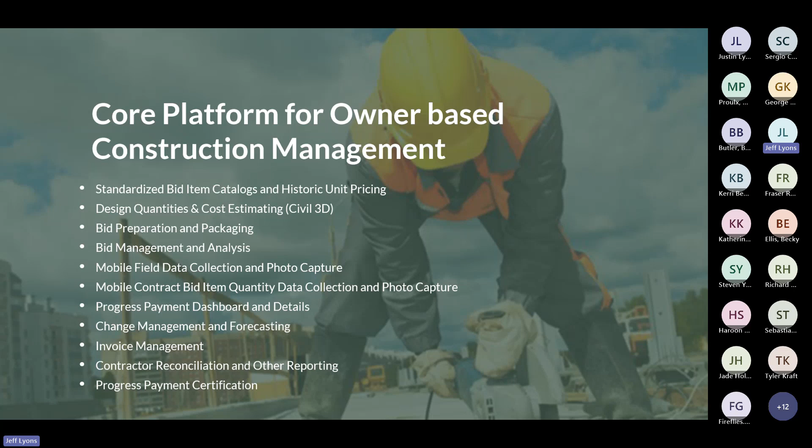This is the core competency of our company. We have over 120 organizations in Canada, over 40 municipal clients and the federal government using Builterra. It's been around for about 10 years, so it's very mature, and our consultants like to keep us moving, building more product, more features. So you'll see some of that today.

The enhanced platform for project management is something we added to address partially the US market and some of the competition, but largely we are built from the ground up. So we do provide these kinds of functionalities, but our strong suit is the field inspection, contract administrator, project manager level workflows. In other words, we make it easy for construction people to use a digital product.

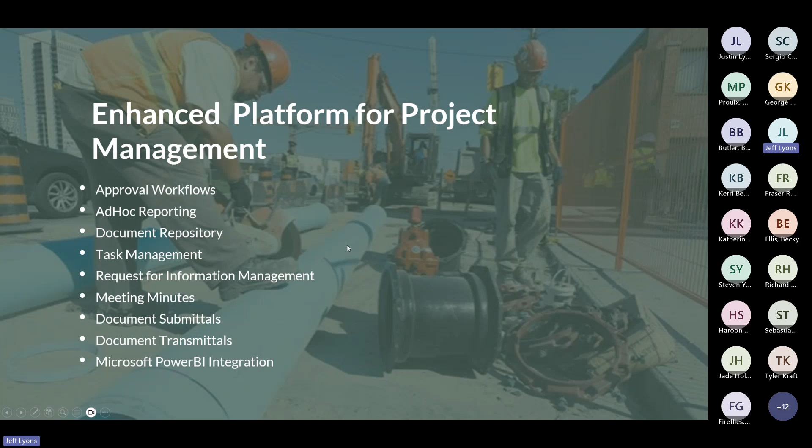So everything we do is geospatially aware, and the user doesn't know anything about that. They can use the mobile app, they can use the website with very little training. So collecting data and reporting is what we do.

We do support the more accurate GNSS antennas, for example Trimble Catalyst, EOS Arrow, and many others, as well as locators. So if you're using this for paint line locations or subsurface utility mapping, our mobile app is capable of doing all of that. Again, it's very civil focused, very linear focused.

In fact, we're probably one of the only mobile apps that has the ability to read a Civil 3D alignment if it's been posted to the Builterra project. I spent the better part of 25 years in civil engineering, so these are all of the things that I wanted to see in the app itself.

Okay, now let's get on with the project itself. This really started in 2015, and it was prompted by RV Anderson and WSP at the start. Builterra was really built, I'll call it, in the heat of the fire. We built it specifically to do City of Toronto CIPP work.

Now, City of Toronto does not have Builterra, but we did build what we'll call a bid catalog for the City of Toronto projects for our consultants. So if you're building out a bid manually or through the cloud system, which we'll talk about in a second, then we have the City of Toronto bid already in the system. Now you can also add other cities, towns, counties.

So this is the thing about civil engineering: everybody's got their own sort of take on what a 12-inch cement-treated base is, with their own item codes, and I think you probably know that through working with DOTs. Everybody's got their own different little item, even though it's probably the same thing. So Builterra can accommodate all of these different catalog types based on your work.

You can also enhance things. So this is something different. I think as well, we're one of the only ones that can enhance the bid item to include design-specific attributes. And this was put in specifically to extract and populate bid tabs from the design, almost like a building information modeling concept. And because a CAD designer and a GIS person built this system, this was sort of the avenue we wanted to go.

In other words, item code, description, and units is very little to do cost estimating. We want to be able to do cost estimating based on the depth of the pipe, the class of the pipe, was it built in spring, this kind of thing. So we can handle almost like a GIS type query when it comes to estimating.

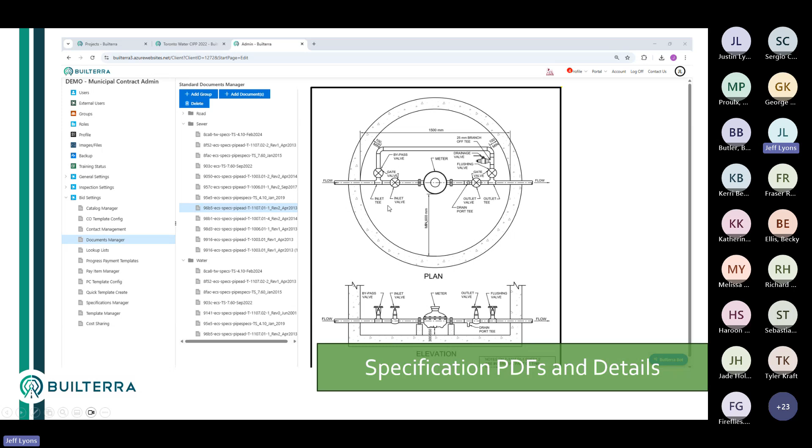You can also add details to the documents manager. So if you're dragging and dropping this particular item, it will bring the detail with it. It'll bring the written spec with it, so it's part of the bid package. So just thought I'd let you guys know that. And of course, you can add the bid documents manually if it's not attached to an item here. So you can start adding them, and this will be part of that bid package. So you could add contracts, whatever you want to do.

In the end, you're going to award the bid, and there's a little award button back in the bids tab. Under progress payments, you'll now see a zero inspected bid, essentially. And this is where we get to go to the field. And this is sort of where a lot of our consultants start. So going to the field is you import the bid data, make sure the pricing is right. You award it to the bidder who won. And then it starts this construction contract admin process.

And like I said, it looks fairly straightforward so far. I don't know how you're doing it, maybe pen and paper, maybe something more complicated. There's other larger systems which are good for office people, but not great for field people. So we focused our entire effort on field data collection. And so we have people, 18 to 70, literally, using the Builterra app. Stories like when I started using the app, I was just about to retire, but then I decided to keep working for 2 more years. That's an actual story. Because it's easy to use and it cuts an hour off a day for anybody using Word or field notes.

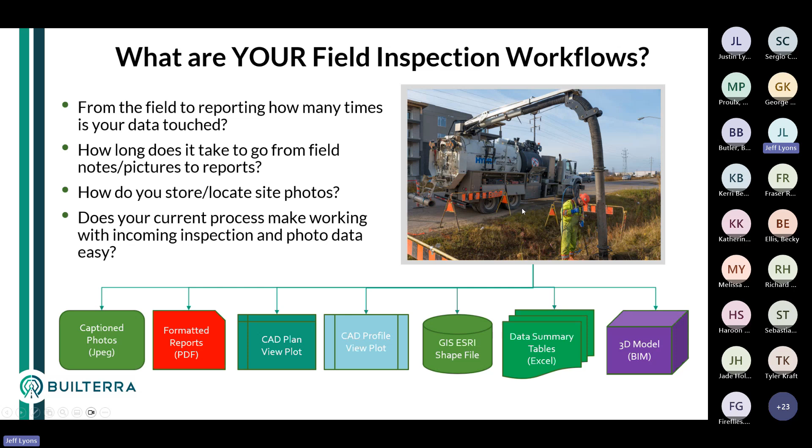The idea is you pick up the data and then you do something with it, and this is where we come in. You'll notice Hydrovac; one of our pre-construction use cases is subsurface utility engineering. We're big into that. We're also big into geotech. Also big into bridge inspection. So Builterra is used all over the civil world to do data collection and reporting.

The app, like I said, is very simple. When you log in with your email, you'll see your list of projects that are assigned to you, and then literally you can do something. You can go to forms, documents, or tasks. That's it. Buttons are pretty big.

Even borehole logs can be captured here. It's one of our more interesting use cases. Of course, task management, documents, take photo anytime, anywhere. So this is easy to use.

The documents thing is you can access any uploaded document to the document repository. Specifically, you would want to put documents that the field people want to use. So in this case, I don't know if they'd want to use CAD standards, but say a geotech report or maybe issued for construction drawings or something. So this is not meant to be as extensive as a Bluebeam, but if you're only using Bluebeam to review PDFs, you might want to rethink that.

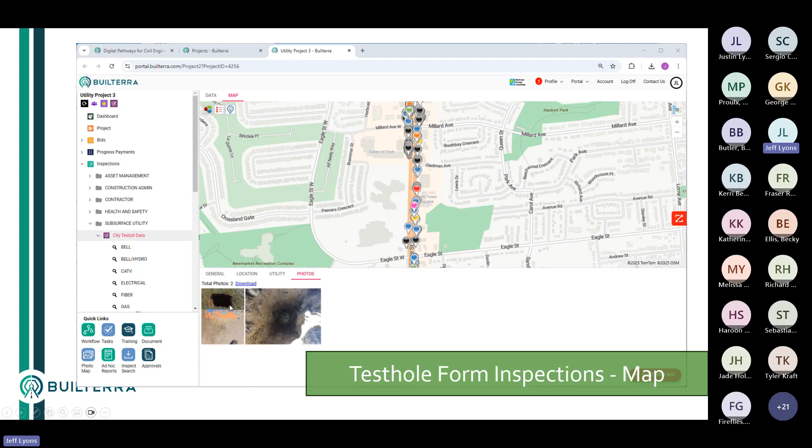Nothing to do with construction management, but it's in the exact same system that all of your construction is being done in. So if you're looking at a map, you'll see all of your construction related tasks and other things with all of the hydrovac if you want. So it's all one big database. The mapping system, you can do thematics, theming these, in this case, by utility type, and of course, access to geolocated photos and data. The tabs at the top change as you configure the different data. So very flexible depending on what you're collecting.

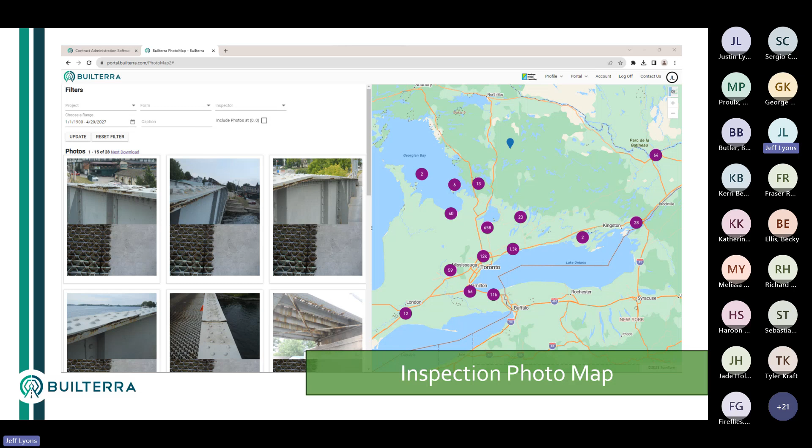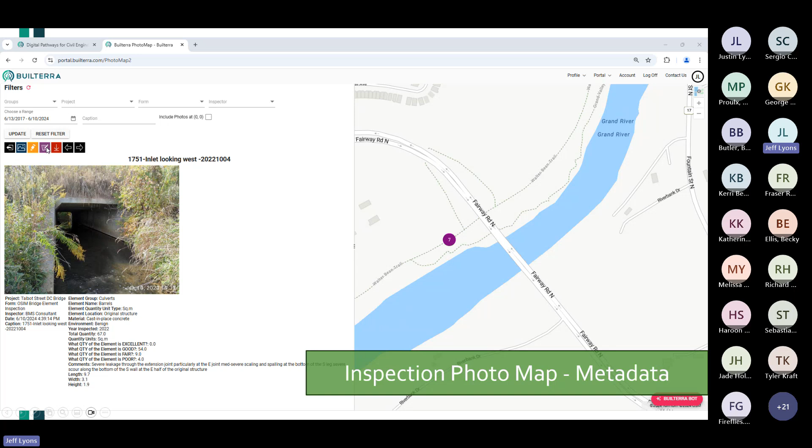There's 7 photos here. I guess I missed that slide, but if I select a single photo, you get the metadata. You can select the download report and you can see exactly where was this photo, why was it captured? Maybe 5 years ago, somebody was in there doing a culvert inspection. So that's an OSIM report right there. That's a standard for Ontario. So that's the kind of cloud functionality that is used here.

If we take that mobile inspection piece and expand it, we get into more of an open form, it's called daily diary. It could be called anything, but all this is configurable. The daily diary is a little different. It's not just a single visit. It could be you're going there multiple times to add multiple lines of data for multiple things. So for example, if you have labor, equipment, materials, visitors, comments, contract items, it's all sort of like sub-tabs, sub-tables in the parent daily diary report or the site daily report.

So the concept here, and this was well thought out when we worked with the consultants, was when I select it, you could create one brand new, or you can preload it with Excel. And preloading it means that people in the field can simply go, oh, this is the day I'm adding to. And when you have a large project like CIPP or road resurfacing, you could have one huge bid, which has multiple streets in it. And the idea is you might send out 10 inspectors to 10 different locations, and you could have them all do all of their quantities for that single project all in one daily progress.

And so it's a database, so as they're adding progress quantities, it's compiling it in one single progress report. You don't get 7 different progress reports, and it has their initials beside the quantities, so you know exactly who did it, what street it was on, this kind of thing. So again, I don't know if there's other systems that do that, but it was very specific to these city projects that we have multiple people be able to access the same form. Location's not so important for daily progress, but you still get it anyway.

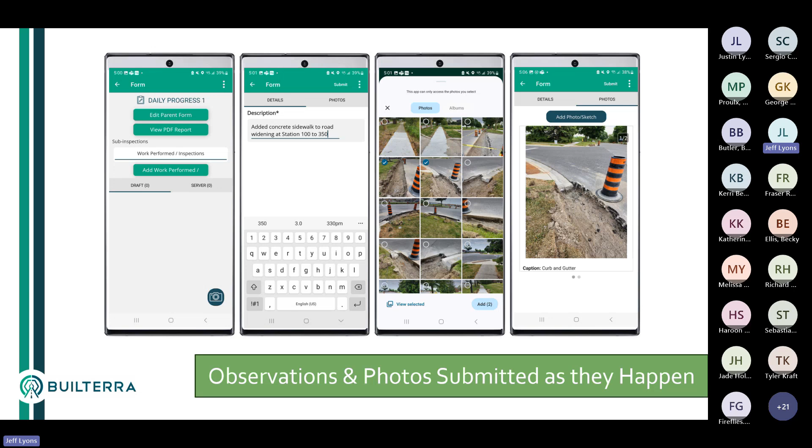When you submit, keep in mind that it's like a little text message. It just sends off to the server. It's not that at the end of day you're putting this together; this is all throughout the day. So it's as it happens. Okay. You can mark up those photos too, by the way. I didn't show that. So daily quantities is a little different.

We talked about the concept of awarding the bid. So daily quantities is a subtable that's been tagged with, hey, go to the awarded bid. And so again, you're going to select this. You're going to get into a section group here. And then here's all the bid items. So then you'll see how much is in the contract, how much has been built to date. So it's all reading from the database online. We do work offline as well, just in case you had that question. Being up here in Canada, we have lots of offline use cases.

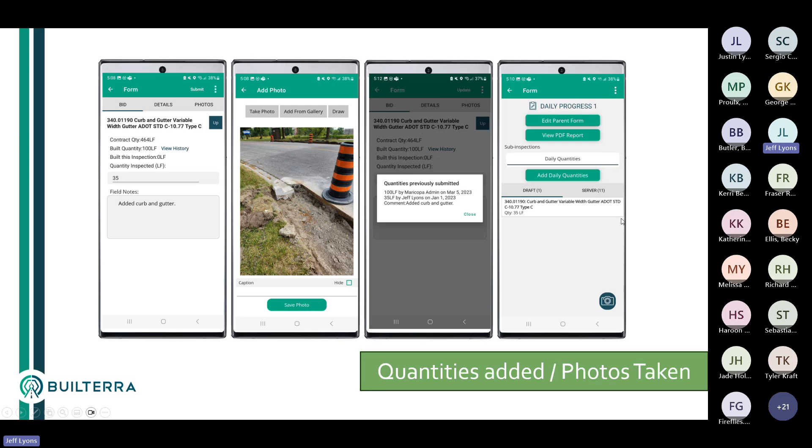So when you select an item, you'll see how much is in the contract built to date, and you just type in the 35 feet that you're observing and take some photos. If you're interested in what happened last time, you can view history and get a list of all the other inspections you did. The bottom line is you will then simply submit this entry, and that's how you feed the progress payment. That is why we can start generating progress reporting through the system. Very easy to do.

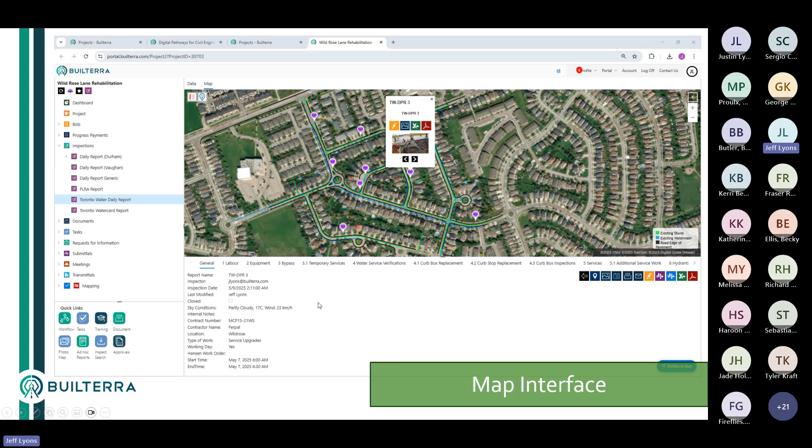The progress reporting in the office now, or a site trailer, if this is a laptop essentially, you'll see all the inspection data with all the dailies here with photos, okay? And like I said, this one is actually this Toronto Water Daily, and it has so many subtables here. It's kind of crazy. So you've got like 20 subtables. So they had a very detailed use case, I guess, that needed all that. Bottom line is you're going to add entries throughout the day, and then you're going to take pictures, caption the pictures. And there's some photos here.

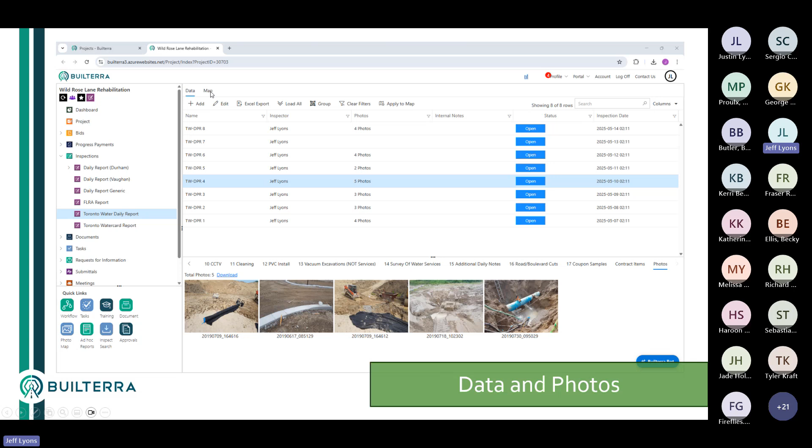Okay, very good. Anything in a map view, which we don't really see here, it's not important, but basically you could review all the dailies in a map. If you want to edit the inspection, it sort of just pops up a pop-up window, different tab. And these are, again, all of these, looks like they have 17 different subtables, plus the contract items. So it's kind of a lot. I would probably break these out into separate inspections and do something else, but that's what they wanted.

So the idea is when you add here using the laptop, you can do exactly the same thing. It'll drill into the awarded bid, you can pick the items you need, select the quantities or type in the quantities, and then it will produce the progress payment reporting. So very connected. This is the output. So every report we do is stylized based on what the client likes to see. In other words, we're not trying to change the way they like their reports to come out, we custom code this to match their current standard. But the entry systems are always the same.

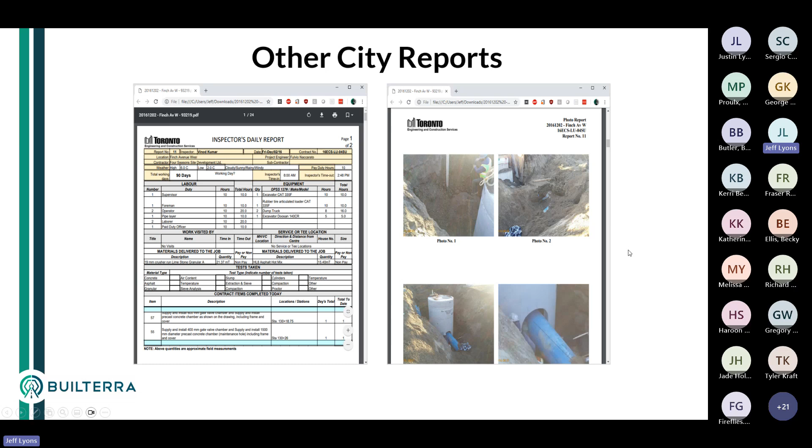reporting specifically for clients. And so this one is, if you use the name of the street in the daily reporting on your payment item, that's a variable, by the way, the street name, then we can slice the data using street name quantities here. So you'll get a Monday to Sunday report with just quantities, no price data, and it's broken up by street name. So this is kind of what we'll do for various clients. We do all kinds of different custom reports because it's just data sitting in the cloud database.

Part of the success of getting the progress payments to come out right, so at the end of the month there's not a big argument about invoices, is this was our very initial approval workflow, and people still mostly use it because it's like 1, 2, 3. You can send it through an approval workflow that has a much more complex sort of flow to it. In other words, you have to specifically tell it to email certain people, and it's much more complicated.

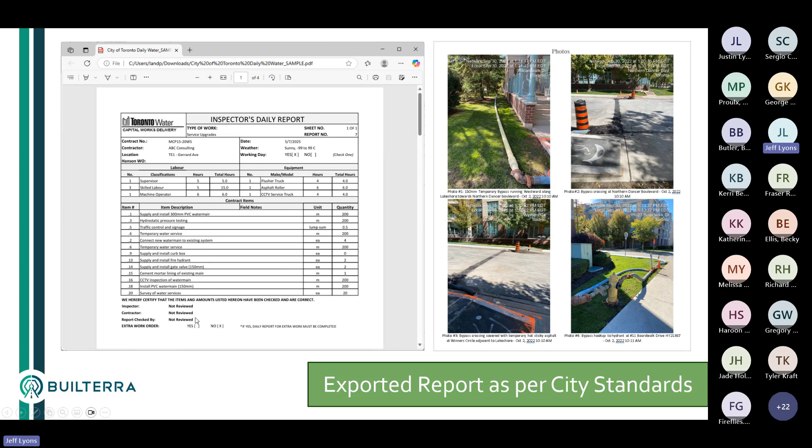We'll just take a quick look at that one more time. Right here, in this particular case: inspector, contractor, report checked by. So that review process gets filled in here, and it's all very organized as far as approvals go. So this is how the CIPP was done, all the reporting. You'll see kind of where it is in the process for this contractor, and if it was approved or not, right there.

Now, of course, all of that contract quantity data is feeding the progress payment system. Before you do any inspection, it's zero. After you start inspecting, these little gas gauges start to move, and you'll see that in a second. So first thing we're going to do is create a new payment certificate.

If I click on that green plus button, I can add the start and end dates. It's really the period, the payment period, and then it accumulates all of that quantity data between those two period points.

That's straightforward. You can put in other things like invoice, what type it is, holdbacks, releases. It takes care of many things required for progress management. So the idea is this is the summary here for the period, and as you drill into the subtable, you'll see exactly what the period was with a details tab here.

The concept is that when you click on details, you'll see exactly all the inspections that contributed to the value of 10 for that period. So it's really simple to find out who did what in case there was a typo or something. You can go to view and it'll take you right back to the daily inspection that contributed to that number of 10. So it's super easy to navigate.

The water and sewer as-built cards are a one-off, but very popular amongst the consultants and FERPAL themselves doing this type of work. Essentially, to get paid or to prove that a particular street is complete, you have to produce, at every curb stop or water service valve, for every address, a report that says: I've redone the water main, put in a new service, and replaced the curb valve, and here's all the information in a map, and go to the next one. So these water cards and sewer cards are very typical for this type of work.

In this case, we have a water card entry, and this won't take long. I know we're running out of time, but for the water cards you would create a new one, or you can see all the ones that have already been done because I did a refresh. When I select, say, 20 Wildrose, you can select it either in the list you just saw, or you can select it on a map, and you can see those overlaid here.

So again, this is just a simple single-visit form, nothing complicated. You just keep answering the questions: location, existing, new, and of course the water main, what type of water main was put in. And the sketch itself—we're unique because I did CAD programming for most of my career.

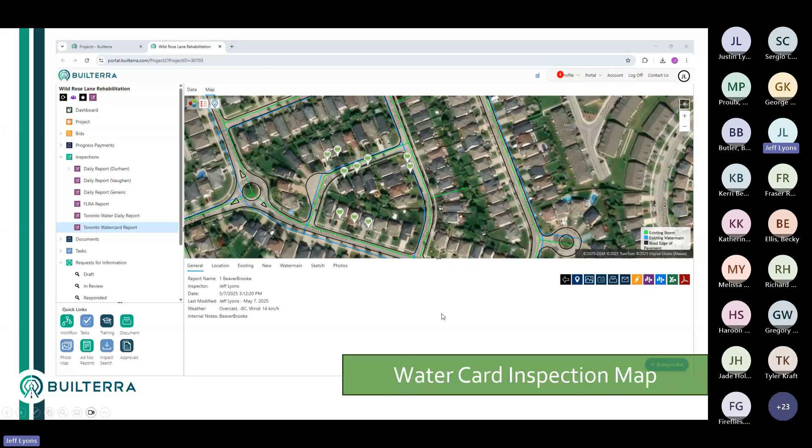If I click on photos, you see that one photo that was taken in the field, but then you see this water card sketch here. So this thing here has been drafted by AutoCAD. I know it sounds a bit extreme, but it essentially builds out an AutoCAD sketch based on the data that you typed in on your phone.

And we do all kinds of different types of sketches like this. Like we mentioned the borehole log at the start of the presentation, we can do actual borehole logs that compete with open ground, literally. So there's all kinds of AutoCAD things we can do here for that.

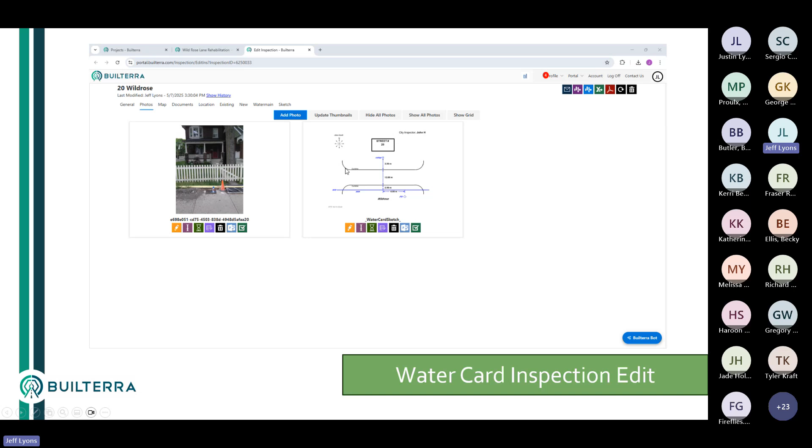So put these two together and we get the report. And this, I know it doesn't look great, but that's what the city wants. Even the yellow, that's what they want. Anyway, so you can literally do these water card reports as fast as you can hit the submit button.

When we first met our consultants at FERPAL, they had 6 people in a room doing these, day in and day out, 10 to 15 minutes each with breaks. So we can do them in the field in 5 minutes, automated.

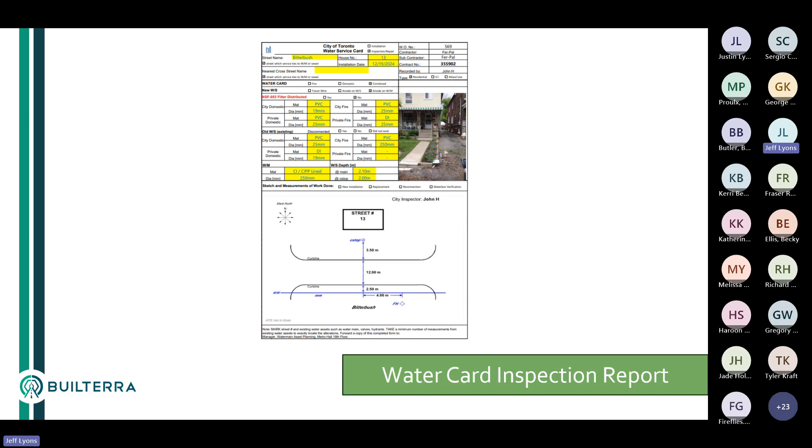And project management, sort of the end of the presentation. Like I said, we had to add these kind of nice to haves. In some cases, like if you're using an e-builder or something like that, it's all project management all the time. Doing water card reports, I don't think so. That's too close to the metal.

So we added project management. We're going to get into portfolio management this year, but essentially project management is everything else but what I just showed you. In other words, documents, tasks, requests for information, submittals, transmittals, all the things that go as part of a project management system. So drawings being the big one.

So these are all user-defined folders here. You can upload things that are required in the field. We're not trying to replace ProjectWise or Autodesk Construction Cloud document repository. This is supposed to be very specific files used for the project field people. You can view PDFs or DWGs.

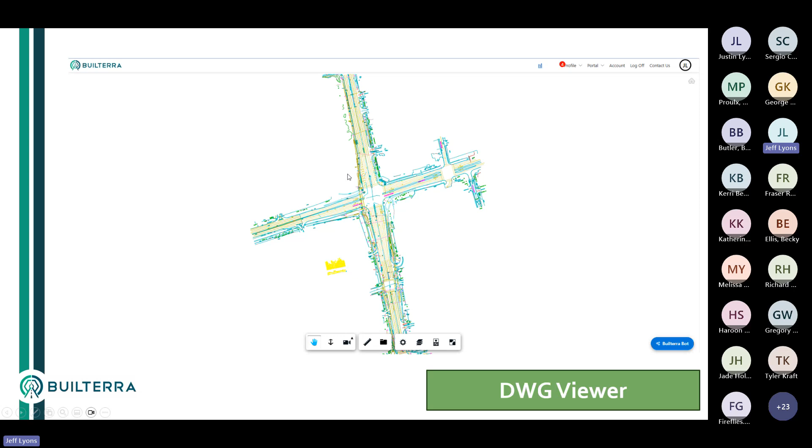We have the Autodesk Forge running to do the DWGs. So you can review and mark up PDFs. You can review DWGs using Forge.

This is for when a lot of times people just need a spreadsheet with a query. They don't want to hire us to build a custom export. So you can go to ad hoc reports and then just configure this to output a spreadsheet in any format, anything you want.

So ad hoc reporting, the task management is huge. You can see this is very interesting. Geotechnical companies are using Builterra to manage the breaks in concrete testing.

So it's not a LIMS system, but if you're collecting field data and you want to put a task on, say, a concrete sample, say you want to break it in 7 days, 14 days, 28 days, you can put together a task for that, and the task will be assigned to somebody in the lab. So this is the kind of weird thing that Builterra can do for people.

The other use of tasks was for municipal consent. Contractors or consultants can submit documents through a task system to be reviewed, and then a task was assigned to the inspector to do a utility review. So lots of different little things there. RFIs, of course, submittals, meetings, transmittals. So it's kind of handling all of these things, which the competition does.